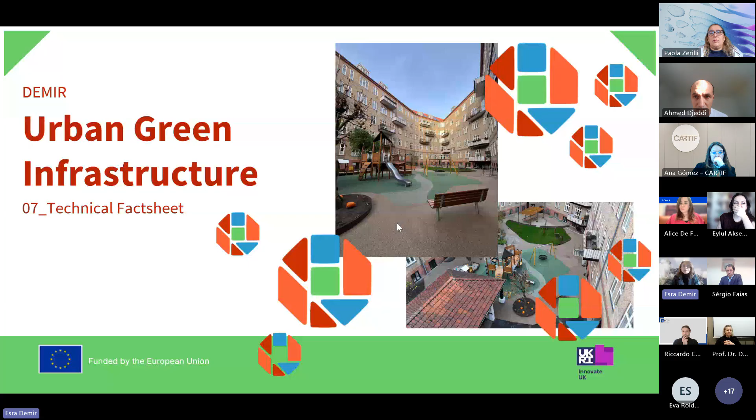So what is it? Urban green infrastructure are designed networks of natural and semi-natural spaces, which can include parks, green corridors, green roofs, community gardens, even facades, green facades, green walls. They are connected networks of green elements, vegetation, and water elements as well.

So the main objective of urban green infrastructure is to enhance biodiversity, improve environmental quality, such as air quality, water quality, soil quality, and it will also support climate resilience by flood prevention or cooling effects, and it supports human health and well-being.

And as you can see, those objectives are not easy to materialize or monetize. So it is a difficult decision for local governments or private investors to make or to justify the investments in order to get financing support.

As we mentioned, the core components can be green roofs, community gardens, urban reforestation, especially if supported by pollination, so that the biodiversity can be more effective.

So the functional benefits, or side benefits, can be said to be stormwater management, habitat restoration, being able to reach green spaces within a shorter period of time, and contribution to the urban ecosystem with health and carbon reduction benefits.

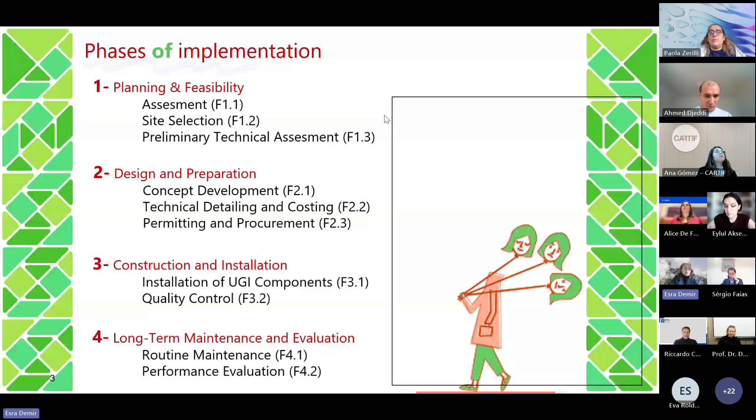So in terms of technical aspects, we have already started talking about how we can do it effectively. It can be really complex, like green roofs, or it can be easier depending on the topography or the area, for example reforestation, if it is suitable. So the site conditions, the existing infrastructure, and the need to integrate routes matter.

For example, when you are talking about green corridors, you need to take into account the infrastructure around the area. The labor, as I said, requires expertise, and it is not very easy to find. Urban green infrastructures are not very technically demanding, but still they need to be carefully designed and maintained.

Initial investment costs are, some of them higher than others. A mixed use of all of them can be a solution to decrease investment costs. As we said, maintenance costs can be significant, and funding sources are usually municipal budgets, but private investors, companies, stakeholders, or citizens can also be involved in funding, though it is not very common right now. Securing funding is key to the maintenance of urban green infrastructures.

In terms of environmental impact, we can say the highest score is the environmental score, because it has a lot of environmental benefits. Urban heat island effect decreases, air quality and biodiversity increase, and as we said, these outcomes are not easy to materialize. It also supports climate adaptation and sustainability of the city.

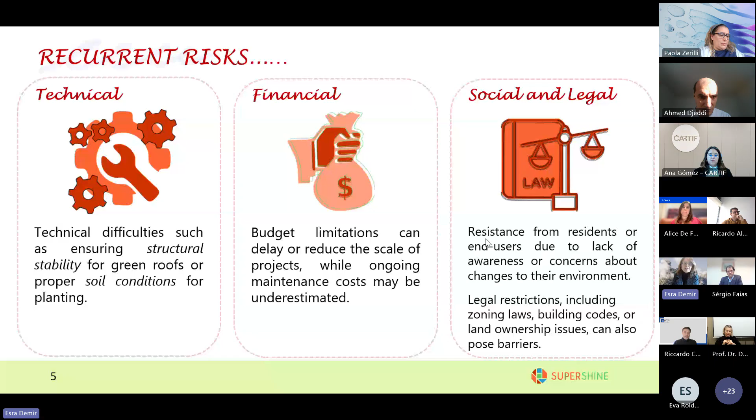Recommendations for urban green infrastructure include integrating it into urban planning early, which makes it easier for the city to implement and allows the best selection of areas to implement urban green infrastructure. Engaging communities at an early stage is also very important.

Site and stakeholder assessments are key to a successful implementation, and monitoring performance and adapting to different circumstances is also key, but this is sometimes the most difficult area in urban green infrastructure.

When it comes to what not to do with urban green infrastructure: if you think of it as just decorative or something that will look nice, it might not be a good investment, or you might overlook some critical issues, leading to more trouble afterwards trying to fix the damage.

Short-term funding will not cover maintenance for the long term, so it's not safe to rely on that. Trained maintenance is very important, otherwise the vegetation might die, there might be water leakages, or many other problems can occur.

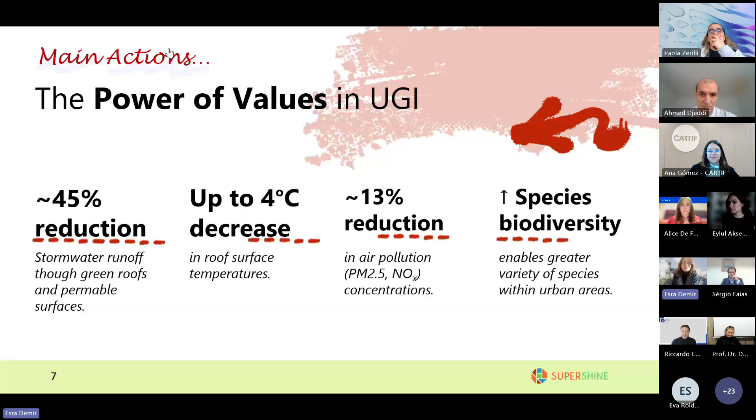And I think that's it. Now I will give the screen to Ana so we can ask some questions. If you've gathered any useful information from our presentation, I hope you found it useful, and if you have any questions, I can always answer.

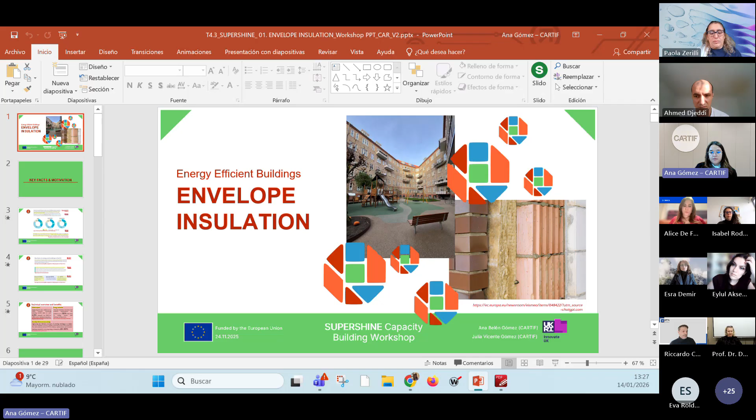Just make it full screen and we are there. Okay. Thank you, Ricardo.

Hello, everyone. I'm Ana. I'm joining with my workmate, Julia. Today we will present the envelope insulation topic. I want to share with you some slides about this important topic and intervention in the building facade.

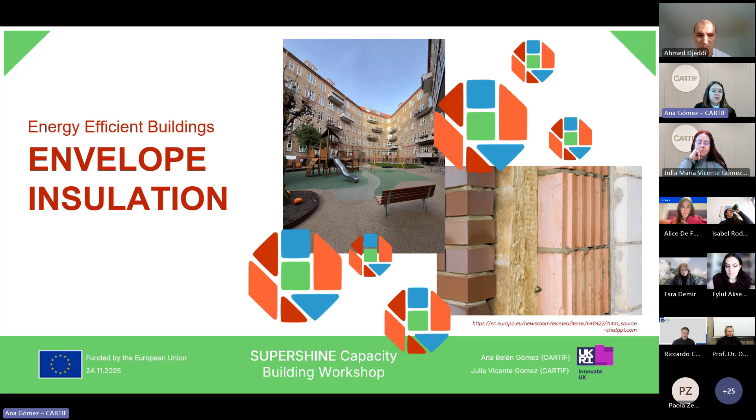Because the work carried out on this element could improve the energy efficiency and reduce energy consumption as well. To start this technical webinar, we would like to share some general data about the European current energy context, so that everyone understands why improving the building envelope is so important and necessary these days.

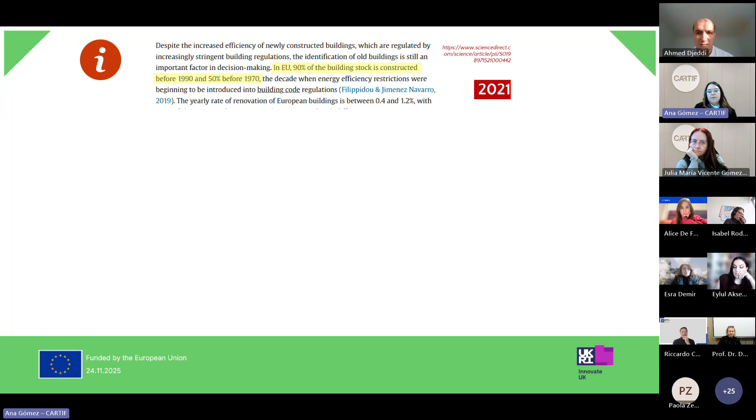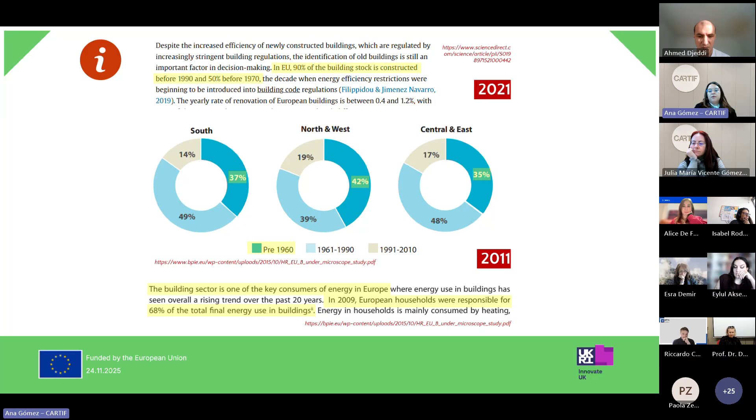According to a current publication on the European Commission official website, in Europe 85% of buildings were built before the 2000s, with 75% of them having poor energy performance, which increases the European energy consumption used in buildings. In the same line, 80% of the energy used in European homes is for heating, cooling, or hot water.

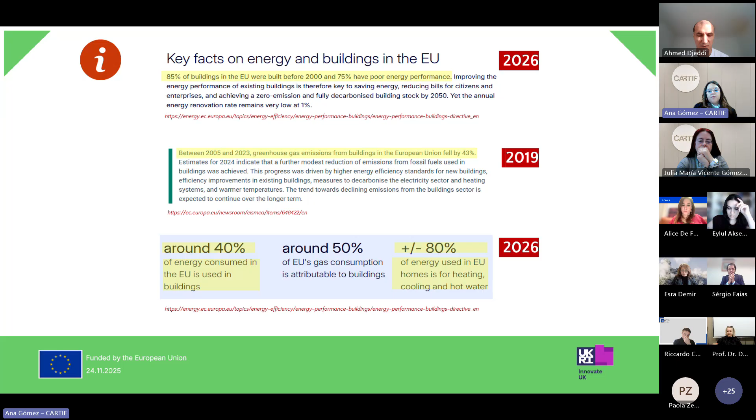Bearing in mind all this data, it's clear that we need to improve the condition of the old building stock in Europe, focusing on the need to improve energy consumption to achieve the European goal of neutrality for 2050. And one way to achieve this is by working on improving the building envelope or facade.

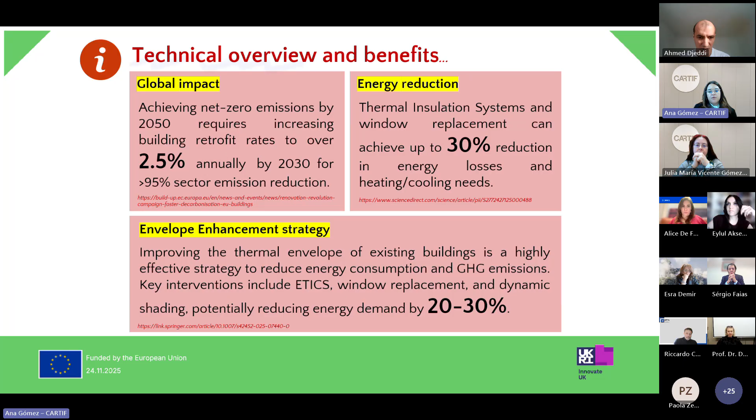Indeed, retrofitting the thermal envelope and replacing windows can reduce energy demand between 20 and 30%, and achieve up to around 30% reduction of energy losses. In fact, the bearing part of the envelope is not changed, but some elements could be added to change the building's energy behavior. Now we are going to see some of them.

I want to focus on the option and the role of passive strategies in building facades. These strategies are design solutions that can reduce energy use and improve comfort without using mechanical or active systems.

The goal of this intervention is to build with envelope, orientation, natural ventilation, and sunlight to reduce the need for heating and cooling. Using natural conditions is one of the key aspects that should be considered when designing or implementing this kind of solution. For that reason, the localization of the building is one of the most important factors in this case.

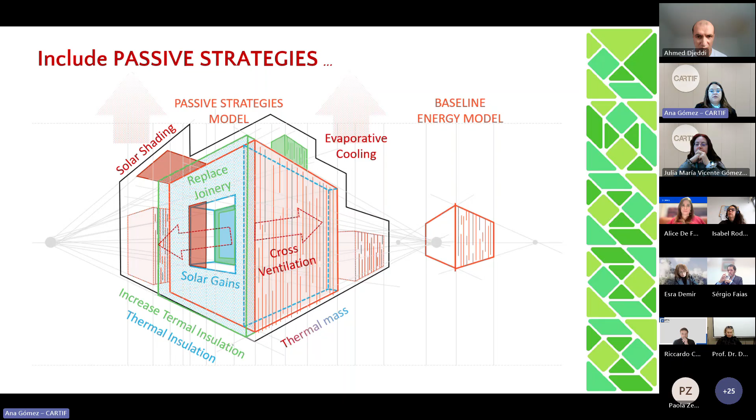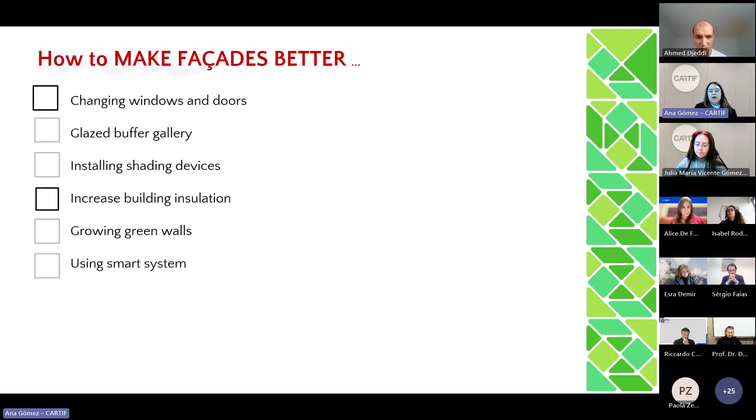Considering the importance of these strategies and under the umbrella of the SUPERSHINE replication plan, we developed an analysis of how many degrees, how much temperature, and how much energy consumption decrease can be achieved when these strategies are applied to existing or old buildings. Now we can start seeing some of the solutions. There are many ways to improve the facade or work with the envelope of a building. Some of the most common ones are the actions we are going to see first.

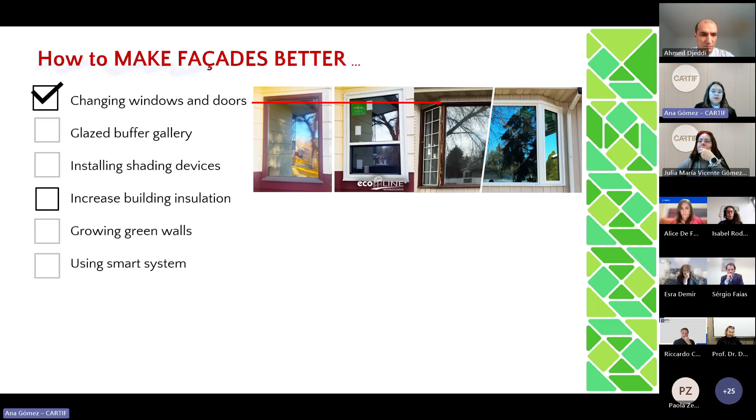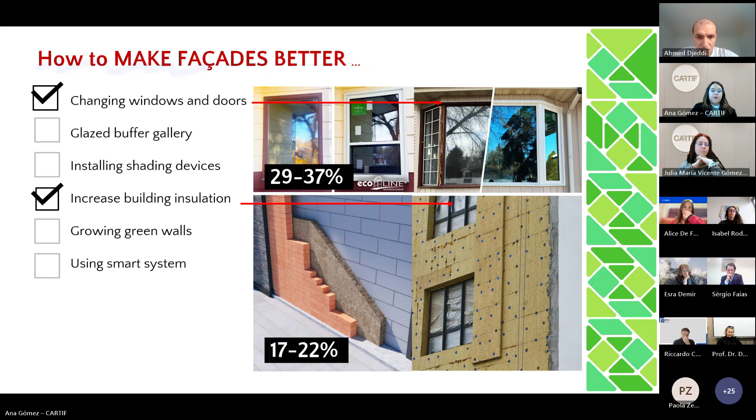The other main action to reduce energy consumption in a building is increasing insulation or using an ETICS system. This can reduce energy consumption by about 33%. In the SUPERSHINE case, the values obtained range between 17 and 22%.

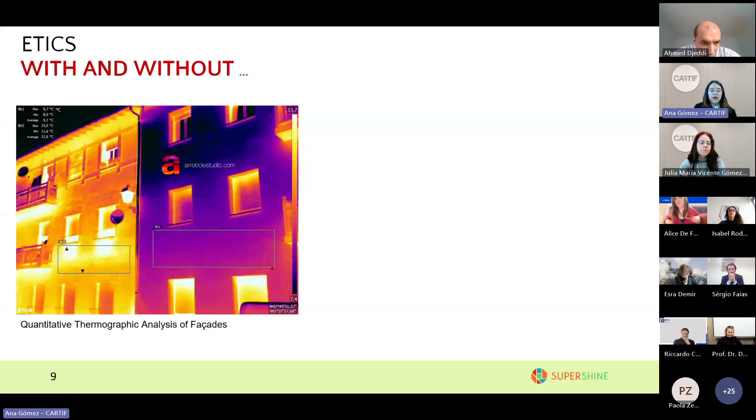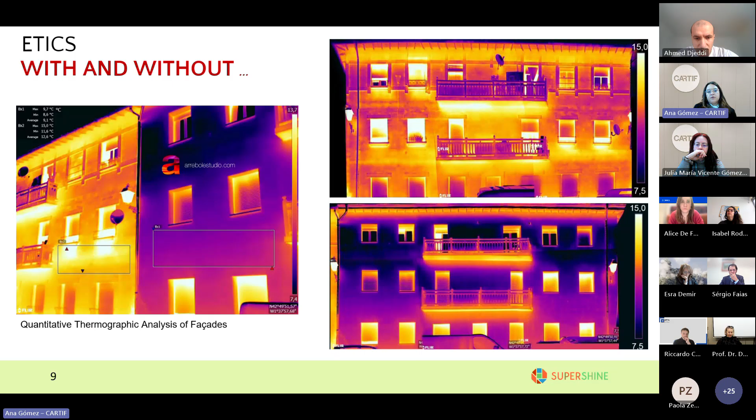Now we continue with the importance of improving insulation in a building. In this picture, you can see the impact of this kind of solution through thermal photos. We can see a comparison of the same facade: one is the original state, the other where the ETICS system has been installed. By comparing both photos, we can see the insulation effect and how conductivity and thermal bridges are reduced. In the facade with the ETICS system, thermal bridges are mainly located on the balcony and in some parts of the windows, while in the original state, thermal bridges are present across the entire facade.

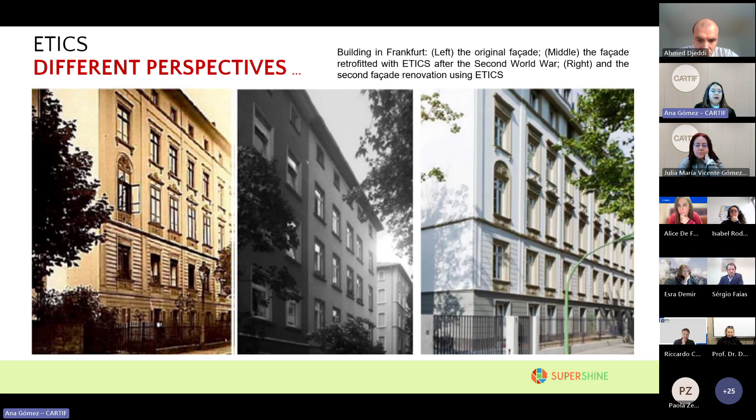A facade that is not insulated produces about 33% of heating losses, and heating losses through the roof are 25% as well, so it's a very high value. For that reason, the roof also has to be taken into account when speaking about the envelope, and it's very important to consider this in deep renovations of old buildings. This picture shows a sample of this kind of deep intervention.

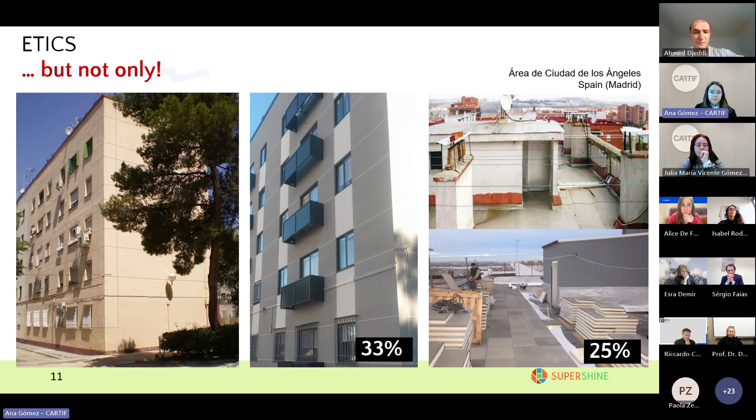For the last part of this ETICS brief information, one thing we have to take into account when intervening in an old facade is the possibility of losing structural capacity. For that reason, one common solution when applying an ETICS system to a building is to include a self-supporting system, or alternatively, create a substructure where it can be installed.

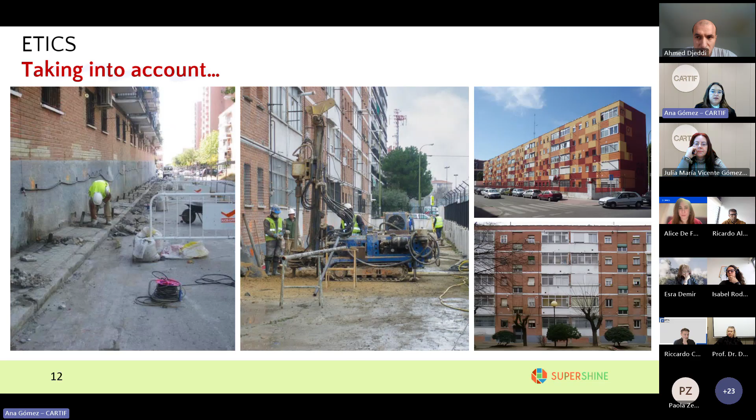Continuing with the passive strategy: another way to intervene in the facade is adding a glazed buffer gallery. This solution can reduce energy consumption by around 50%. In the SUPERSHINE case study, this action will allow an energy consumption reduction of almost 19 to 33%.

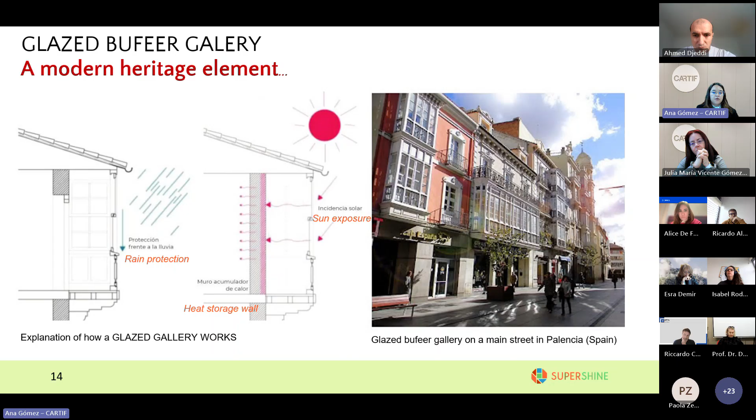These elements also allow sunlight to enter and warm the space. At the same time, the gallery protects the facade from humidity and allows the wall to retain heat and increase its temperature. It's important to consider that during hot periods, it acts as a cooling element, improving performance as well.

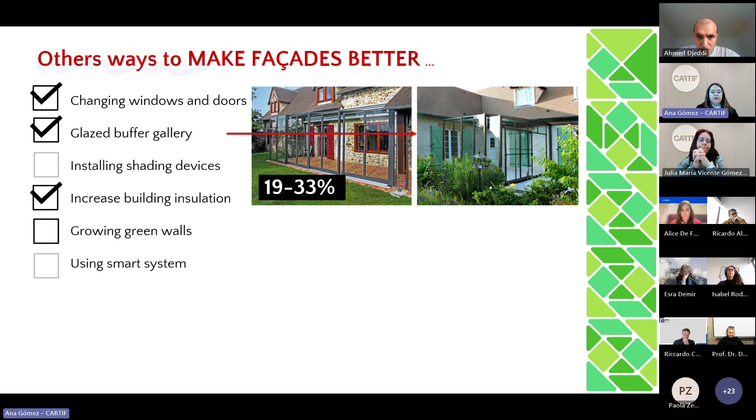Another system that can be installed in envelope retrofitting is a green wall. For the case of green facade, its installation can reduce energy consumption by around 22%. And in the SUPERSHINE case, the value ranges between 11 and 80%.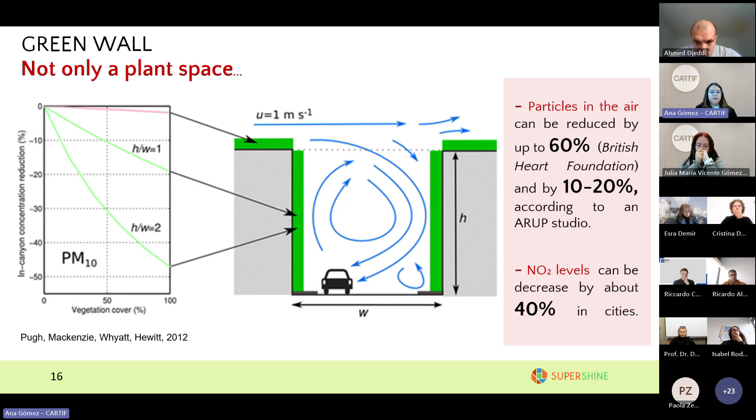Green facade and green roof can help reduce these problems. Previous studies showed that the installation of these elements in urban areas can reduce air particles by up to 60% as well. These types of solutions are linked to nature-based solutions presented previously by Demir.

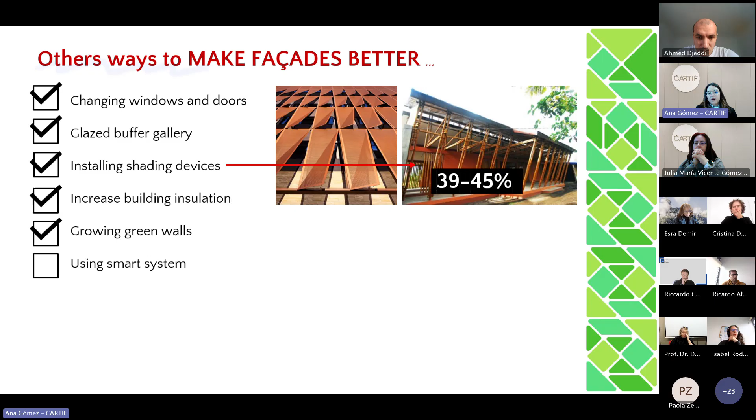Another important intervention, especially because of climate change and the increase of world temperature, is the installation of shading elements. In this case, the design of the solution is very important as there are many different types of structure, material, and ways to install them. This element is not only an aesthetic option but a really functional one, because it depends on the location of the building and the placing of this element.

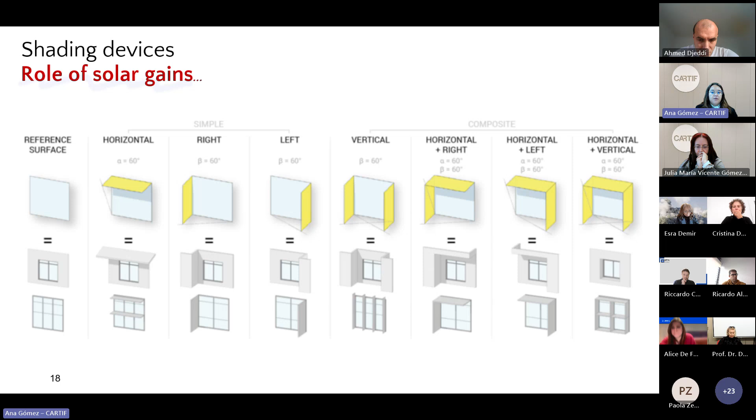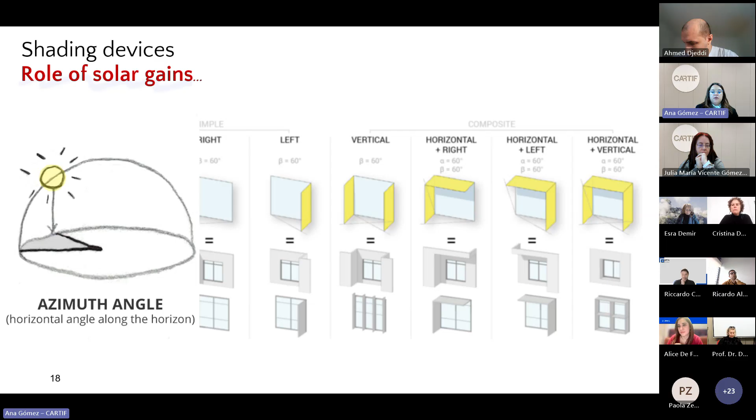One thing to take into account in this installation design is the azimuth and the sun altitude angle. The azimuth is the angle between the north and the perpendicular angle for a window's position. And the solar angle is the angle formed between the sun and the floor projection of the building.

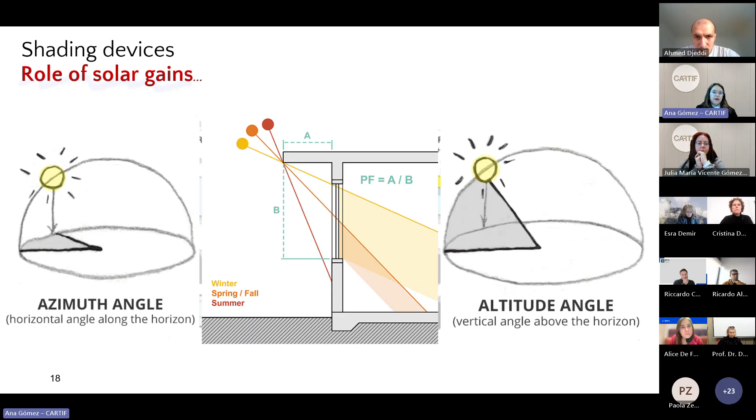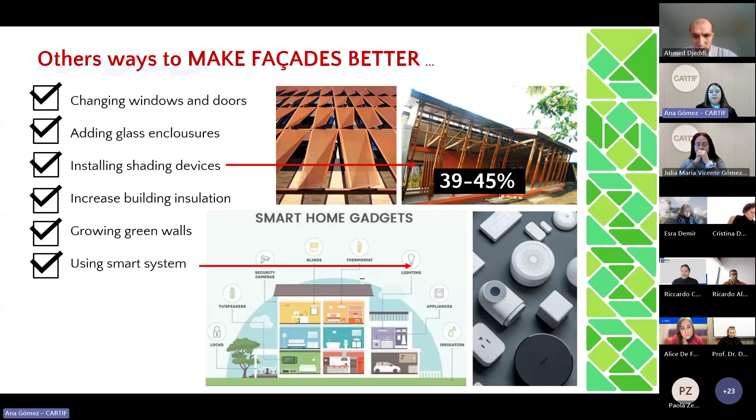Finally, for this part of the webinar, I want to continue with a brief talk about smart facade sensors. This element is not strictly a passive element or strategy action. In many cases they are installed on the envelope and help improve the energy behavior of the building.

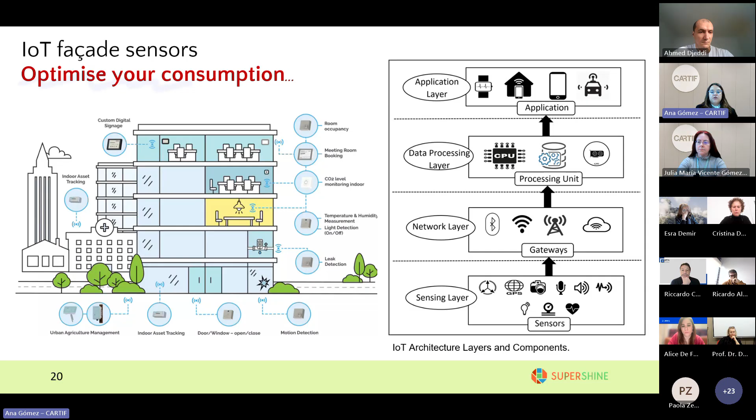The sensors control energy use and improve comfort for the inhabitants of the building, and can be used to adjust lighting and heating, ventilation, or air conditioning systems based on the movement of occupants, monitor indoor air quality, and detect water leaks, among other things. By providing real-time data, they help reduce energy consumption, lower costs, and improve building performance, while allowing the user to potentially know what is happening in their buildings.

So to sum up the previous information, I want to add that it's important to find buildings built before the 1980s, and retrofitting should be prioritized in urban areas, as in general they have higher energy losses. A reduction of around 90% in energy consumption is obtained when you change the windows and improve the insulation.

And interventions are not limited to the building envelope system. You can intervene with other elements such as green facades, glazed galleries, or shading elements, among others.

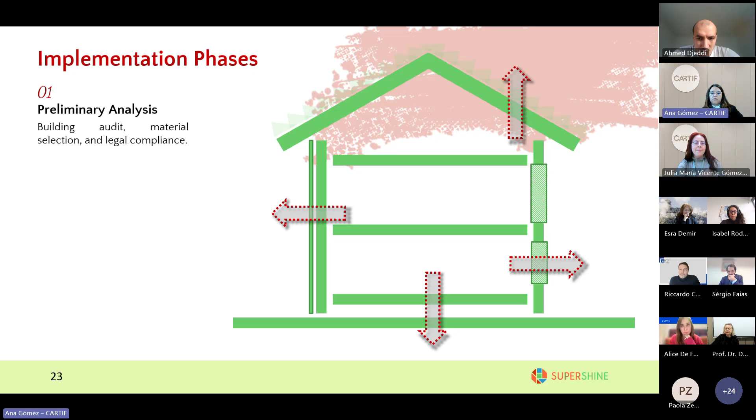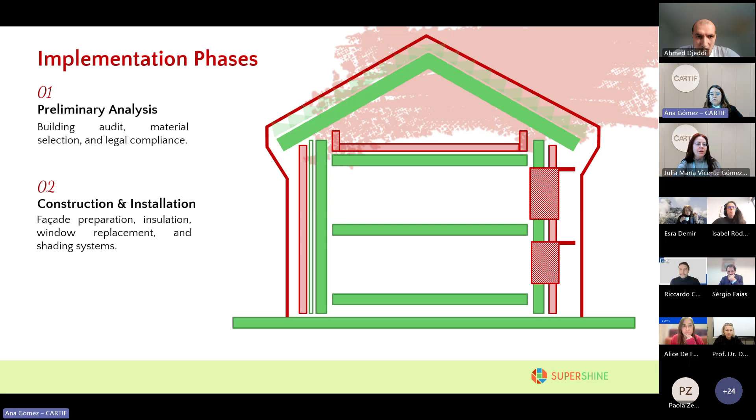Next, the second phase would be the construction itself, the installation of the different elements. This includes the preparation of the facade, in case that is needed, to put some of those new elements for the building, for example the insulation itself, the replacement, and so on.

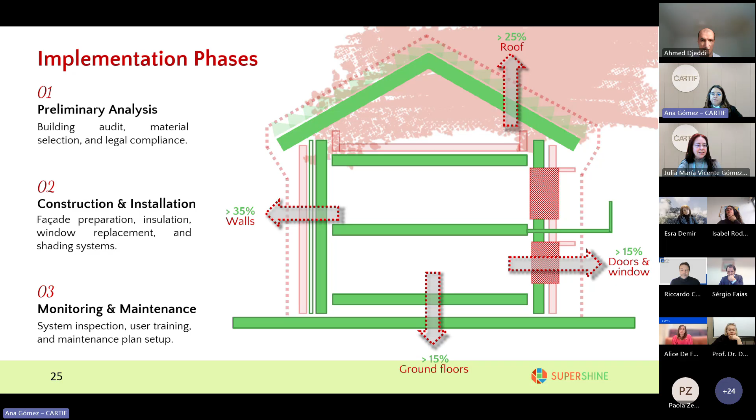Finally, we don't have to forget this last phase, which is the monitoring and maintenance phase. In many cases, we need to put in place different inspection systems. It's maybe needed to have some training, both for the users inside the building but also for the maintenance staff. And also a maintenance plan is needed. All of these will have, together with it, the economic aspects.

Yeah, go to the next slide. Sorry. So the last part of this, we wanted to share with you some of the recurrent risks that we have identified with the experience of the project partners in this kind of actuation in refurbishment of old buildings.

As you can see, we have divided this into different areas. In the technical part, one of the main things is that, since we are retrofitting old buildings, in some cases there can be damage. If we do this initial inspection, we can maybe see some damages that were not initially seen, and this can make the work more difficult. Maybe we are going to have to select different aspects that were not initially contemplated.

We also have to take into account, as I was saying before, the climatic conditions of the city where the building is located. Even with the current time, we have to account for things like heat waves or high humidity climates, maybe if the building is in a coastal place. So not all materials and solutions are to be applied in all buildings, we have to select the more appropriate ones. And as Anna mentioned before, some aspects on thermal bridges have to be taken into account, because if we fix everything, we can have other problems in the future. So technical staff defining the solutions have to take all these aspects into account.

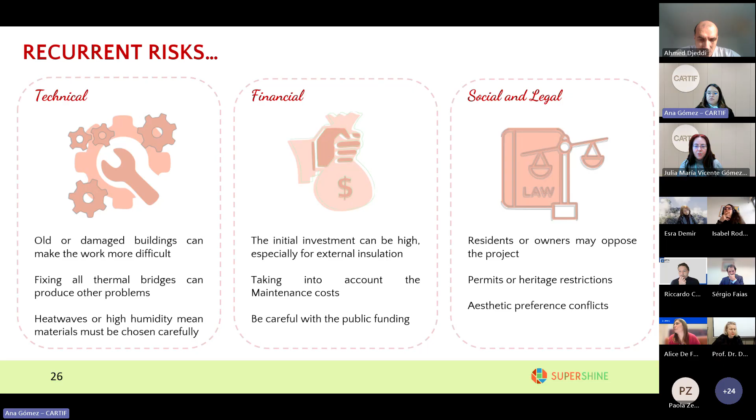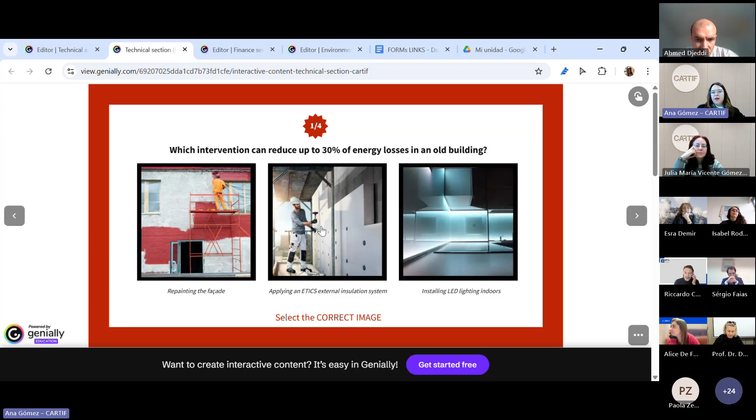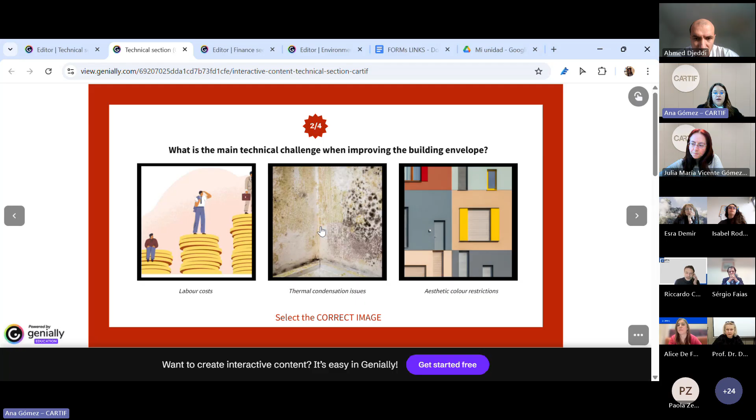The second question is: what is the main technical challenge when improving the building envelope or facade? This information was provided during the first part of the technical webinar, and in that case the correct answer is the second option: thermal condensation issues.

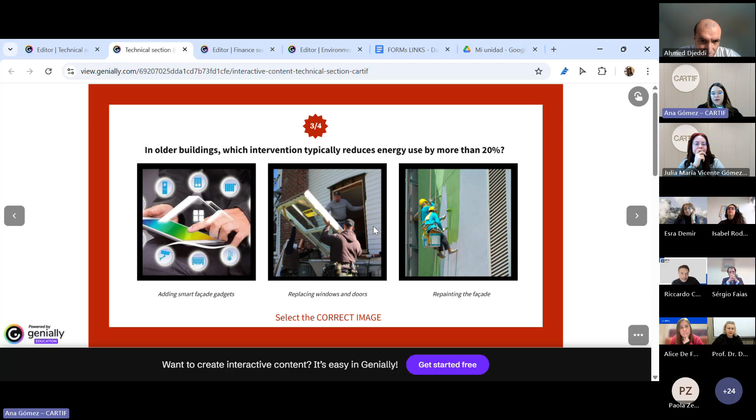The third question is: in older buildings, which intervention typically reduces energy use by more than 20%? Obviously a smart facade gadget takes no action, it's only a sensor, and painting the facade doesn't improve the energy behavior of a building, so the correct answer is the second one.

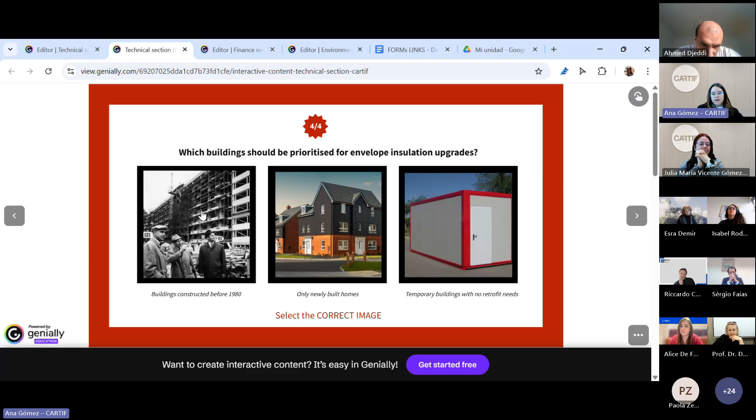Congrats to all the participants. I don't know if anyone has a question about this technical part, or otherwise we can move to the next one if you consider. Yeah. Okay, I personally did it again, so good.

No, pretty interesting. What we see in this presentation is that the combination of interventions, if financially suitable, is one of the best possibilities we have, not only to increase the performance of the building, but also to tackle environmental issues like pollution and health issues related to citizens and people living in the city or neighborhood we are working on.

And so, going through the environmental issues, we move to Circe and to Eva for her presentation. So Eva. Okay, yeah, here I am. Let me share the presentation first. Okay, can you see it right? Yeah, I think so. Is it already presented? No, Eva. No? It's loading. Yeah, not there.

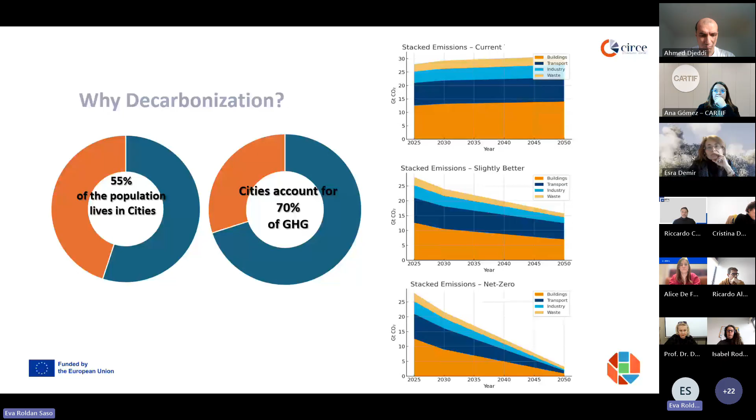To address this strategic axis, we can materialize it or drive it through specific actions like deep renovation of existing buildings, deployment of efficient and grid-interactive infrastructure, larger scale integration of renewable energy sources, or the promotion of zero emissions mobility across the city.

Looking a bit more in detail, regarding the deep renovation of existing building stock, it is one of the most effective decarbonization measures, because by upgrading envelopes, HVAC systems, or installing renewable facilities, it's possible to significantly reduce energy demand while improving the comfort and indoor quality for the dwellers.

By deploying grid interactive efficient buildings, they become or may become an interactive asset capable of adjusting consumption, integrating storage and shifting loads, providing at the same time system stability and facilitating higher penetration of renewable energies.

When it comes to the electrification of end uses itself, it is a key enabler for phasing out fossil fuels, because it allows building an urban system to rely on more clean energy or more clean electricity, in this case based on low carbon sources and renewable energy, if possible.

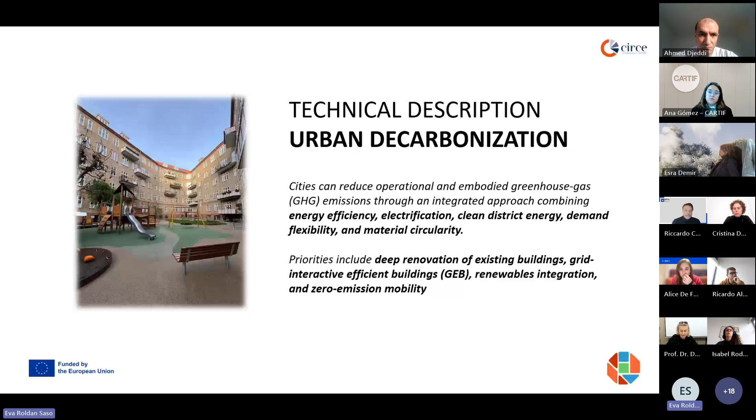Regarding zero emissions in urban mobility, it should also be refocused or transitioned to zero emission models based on electrified transportation modes, public and private as well, integrating digital solutions to optimize mobility flows and reduce congestion.

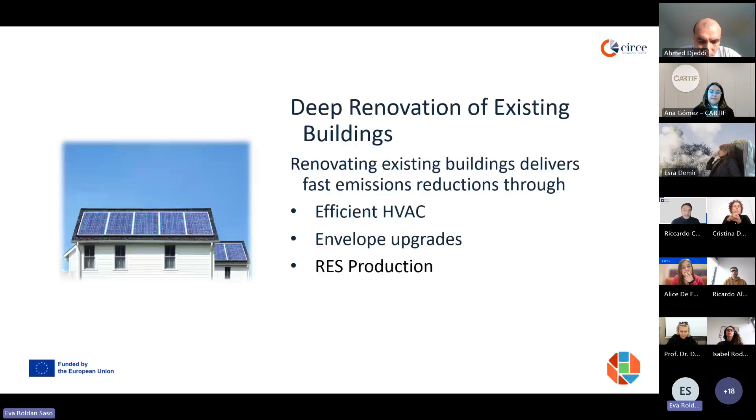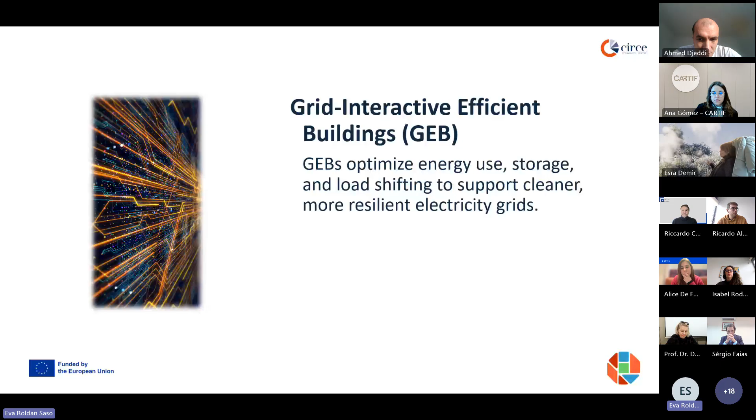But of course, all of these ideas of decarbonization are great, and all of this we already know. They are not news for us at all. The difficult part here is to know how to choose them effectively and implement them properly. For cities to deploy such an ambitious technical implementation in their different urban areas, it's necessary to follow specific preliminary phases or steps based on a structured framework to plan and select properly the most promising ones or technical measures before the real implementation.

The steps to be followed could be the following ones, more or less: the diagnosis and the target setup, the feasibility studies of the possible implementation to be done, third, the technical scoring of the implementations, and finally the implementation itself. The main objective of these different steps is to ensure that the intervention or implementation finally selected is technically solid or sound, economically viable, and allows the cities to achieve their goals.

Looking one by one, when it comes to the first one, it should be focused on performing a complete diagnosis of the city, establishing the baselines of energy consumption and emissions, collecting the building's performance data, and then analyzing the different load profiles. After that, based on the results obtained from this analysis, the cities should define their own targets and plans and roadmaps, aligned with the European goals and the different requirements of the directives in force, like the Energy Performance of Buildings Directive and the more general Energy Efficiency one.

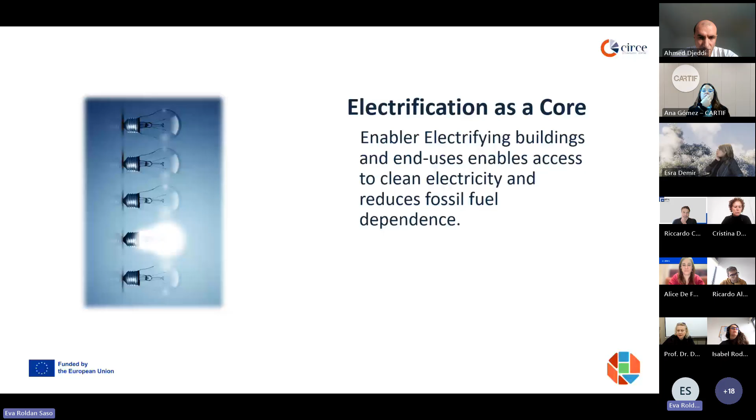In the second step, considering the targets already established by the city in the previous stage, it must be focused on carrying out the techno-economic feasibility studies of the different interventions susceptible to be deployed to reach the different targets. For instance, building retrofitting, electrification of systems, deployment of renewable energies or storage or different stuff. Based on the results obtained from these feasibility studies, the cities should select the feasible ones and reject the rest.

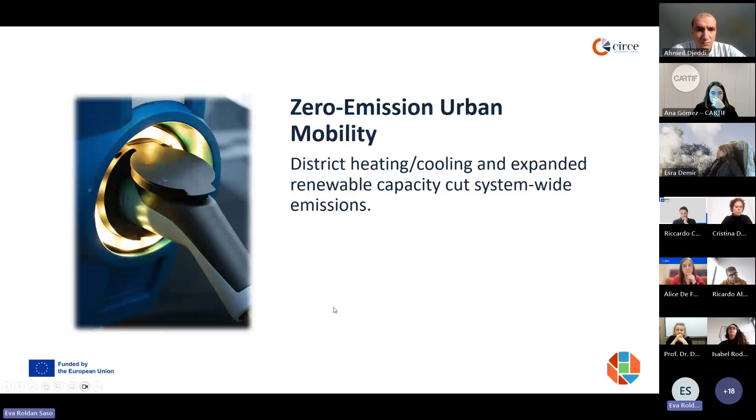So in the next step, once the feasible interventions have been selected for being the most profitable or most viable ones, the city should evaluate these interventions using a scoring criteria, evaluating different aspects or KPIs from a more multi-criteria point of view, including energy saving potential, emission reduction, cost effectiveness, replicability, social impact, or alignment with the European commitments or goals. This scoring assessment should serve the cities to guide their decision-making process and to prioritize their investments, first of all, to select them.

And finally, of course, the implementation phase should include the deployment itself of the specific technology strategies chosen for being the most promising and the more feasible ones, to cover the objectives set up.

But this intervention had to be well done, because it's important to stick to a solid plan to ensure that the scoring results theoretically calculated in the previous step are still valid at the end of the project. Because the costs can be higher than expected if you don't address or manage all the different actions properly.

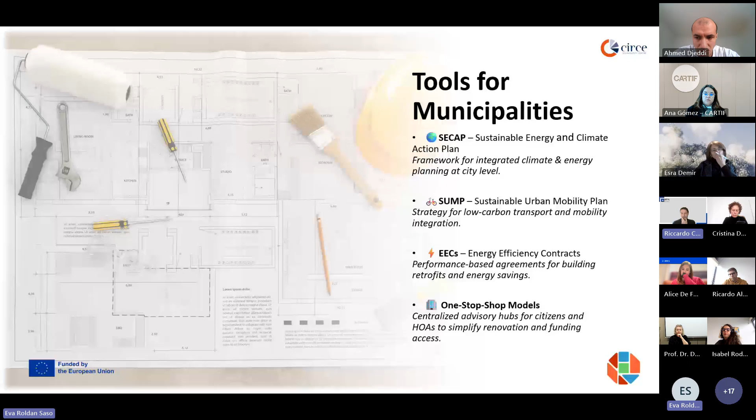Thank you very much, Eva. Thank you, really. We are almost on schedule. Now we have the last speech of this workshop.

It's on our main result and main focus of the entire SUPERSHINE project, the financial solutions and the financial possibilities in order to make the intervention in the neighborhood and have all the positive effects. For doing this, I will leave the floor to our scientific coordinator, the University of York team. So now Paola Zerilli is going to lead this part.

Thank you, Ricardo. Thank you to all the other colleagues for their very interesting presentations as well. So now we are going to talk about the financial solutions that we have been evaluating specifically for the SUPERSHINE Lighthouse districts, but also for the fellow cities. Ahmed, my colleague, is going to talk about the fellow cities particularly. I'm going to share my presentation.

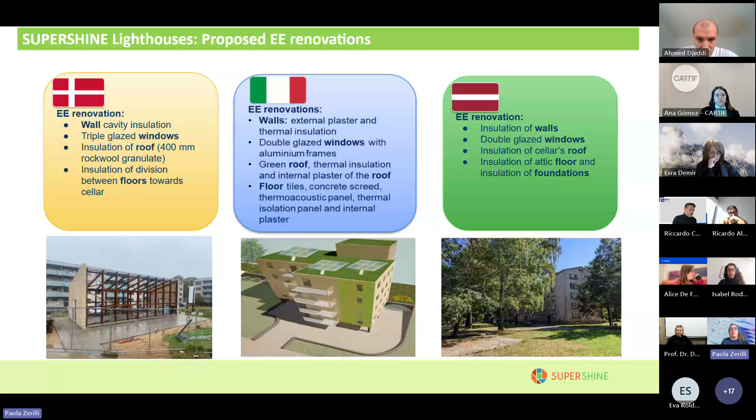And we have been calculating the energy savings associated to this intervention for the entire period of the investment, for all the cases. Again, more or less, these types of interventions have been discussed in detail, and the ideas also came from our Lighthouse district, so a bottom-up approach.

The reason I'm mentioning that is our financial analysis is based on the energy savings connected to each intervention. Considering the annual energy consumption per dwelling, the orange one is the one currently for each country, and the blue one is the one expected after the energy efficiency renovation. As you can see, particularly for Latvia, where the starting point is much lower than in the other cases in terms of energy performance, the potential savings are massive.

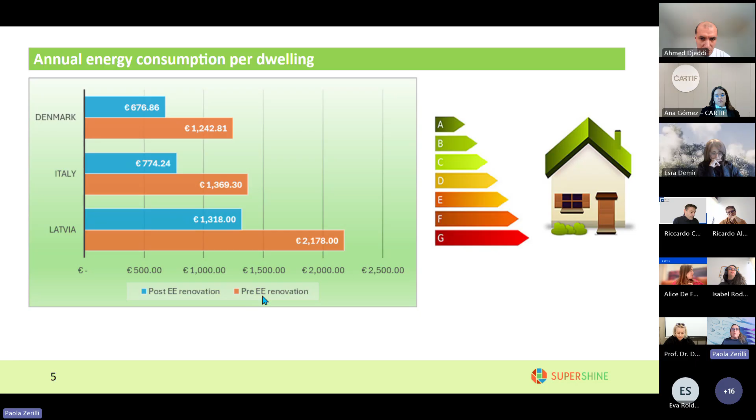Why are we considering all interventions altogether? Obviously it will make more sense because in terms of economies of scale, it will allow lots of financial savings compared to single interventions.

The reason is that we have been asked by our Lighthouse districts to also consider single interventions, because sometimes the entire intervention can be too disruptive for the tenants, or also too expensive to be done all at once. So that is why we have considered the single interventions as well.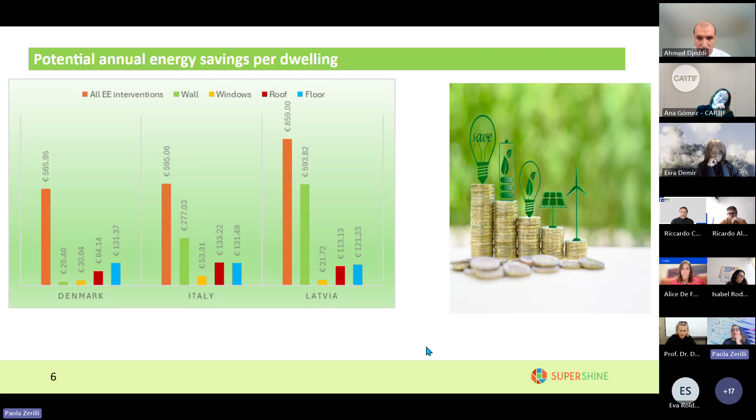Okay, so for most of our cases for our Lighthouse districts, the contract that seems to be performing the best is called share saving contracts, where all the investment risk is taken by the ESCO, and also the maintenance and operating costs are faced by the ESCO, the energy service company.

This applies in cases where the savings associated to the interventions are higher than the minimum guaranteed savings. Minimum guaranteed savings are the cost of debt associated to the investment. So if these energy savings are high enough, then they recover both the cost of debt, plus they get 65% of the extra savings.

In that case, the social or affordable housing company gets 35% of the extra savings. But if the energy savings are lower than the minimum guaranteed savings, the ESCO gets the energy savings, and the affordable or social housing company gets zero.

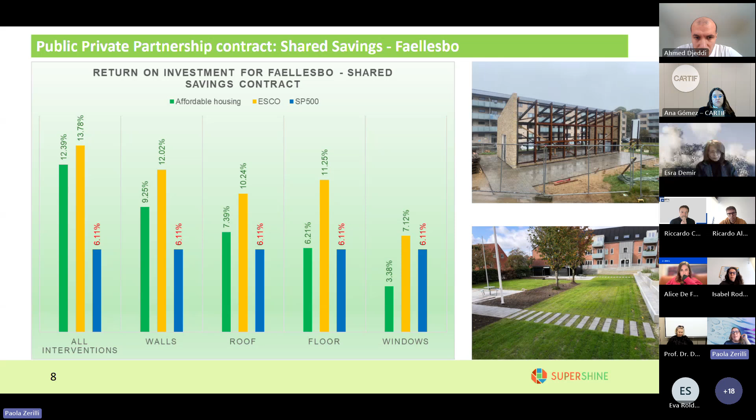But as I said at the beginning, normally the rule or constraint for this type of intervention, in order to get public funding, is that they need to pair at least a couple of these investments, for example wall and roof, or roof and floor, to reach at least something like 30% of energy savings. So that is why in all cases, this type of investment is, even from a financial point of view, not just considering the impact on the environment, very good for all parties, including the impact on energy poverty.

And the same is true for Italy, for Boito. We'll be sharing our slides so you can have more details, and we'll also be putting financial details about this type of investment on our website in the next couple of weeks. And the same is true for Riga.

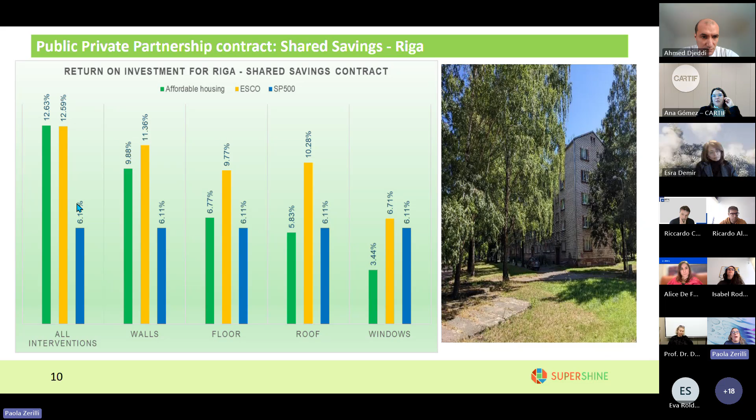So again, just considering it from a financial point of view, these investments are very good because they are always higher than a safe financial investment on the Standard & Poor's 500.

If we consider another main indicator of energy poverty, the percentage of residents unable to keep their houses cool in the summer and warm in the winter, this percentage of people affected by energy poverty goes down massively, particularly in Italy and Latvia, but also in Denmark.

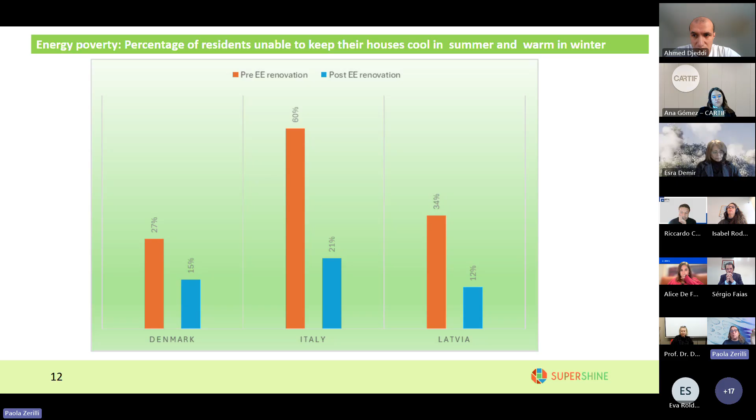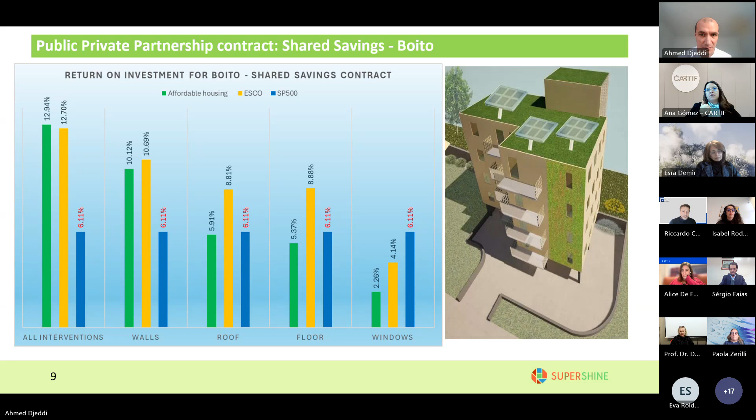Just let me share my screen. Sorry, can you see my screen?

So as part of the SUPERSHINE project, we also conducted financial and energy poverty analysis for the fellow cities, which are Portugal, Spain, Serbia, and Turkey.

So in Portugal, the building stock is 25 houses with EPC level F, and after the renovations it is expected to go to level A, and the total investment cost is 422,000.

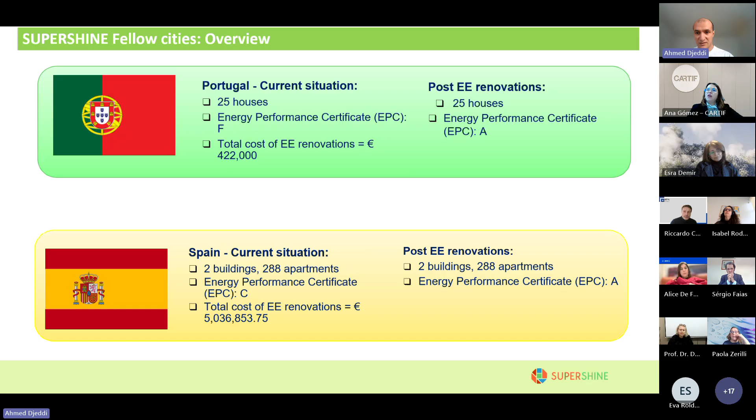In Spain, the housing stock consists of 2 buildings with 288 apartments at EPC level C, and after renovation it is expected to go to level A, and the total cost is a little over 5 million euros.

For Serbia, the housing stock consists of several buildings containing over 1,200 apartments with EPC level E, expected to go to level A with total cost approximately close to 1.5 million euros. In Turkey, the housing stock is 17 buildings with EPC between E and F, expected to go to level A, with total cost over 7.2 million euros.

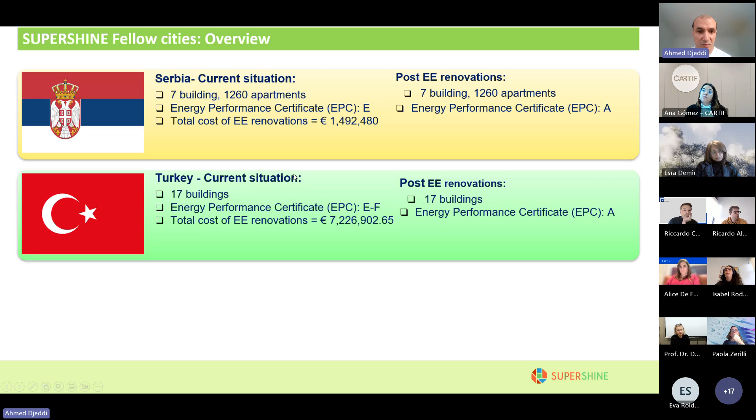For Portugal, we observed that the shared saving contract is also considered the most suitable, and under this contract the return on investment is higher than 14% for the social housing and the ESCO when all interventions are considered, which is also significantly higher than investing in S&P 500. This is also the case for each single intervention except the windows.

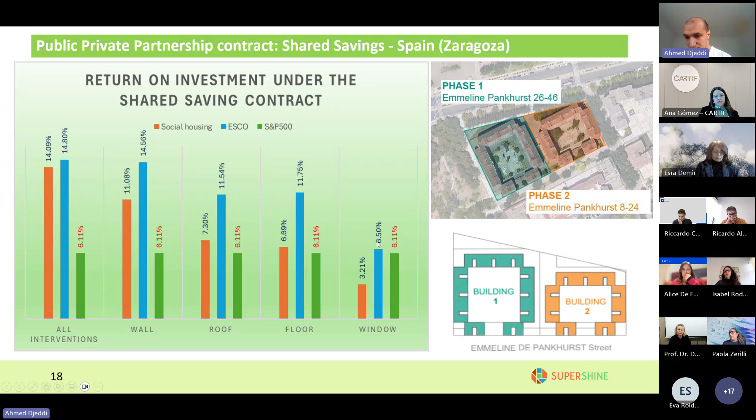We also present the guaranteed saving contract. Under this contract, the social housing organization is responsible for covering the investment cost, and if the energy savings are higher than the minimum guaranteed savings, they receive the minimum guaranteed saving plus 20% of the difference between the energy saving and the minimum guaranteed savings. If the energy savings are lower than the minimum guaranteed savings, the social housing gets the minimum guaranteed savings, and they also benefit from the increased value of the building. For the ESCO, if the energy savings are higher than the minimum guaranteed saving, they get 80% of the difference between the energy savings and the minimum guaranteed savings. If the energy savings are less than the minimum guaranteed savings, the ESCO is responsible for covering the minimum guaranteed savings to the social housing. Under this contract, the ESCO is also responsible for the maintenance and operating costs of running the energy efficiency technologies.

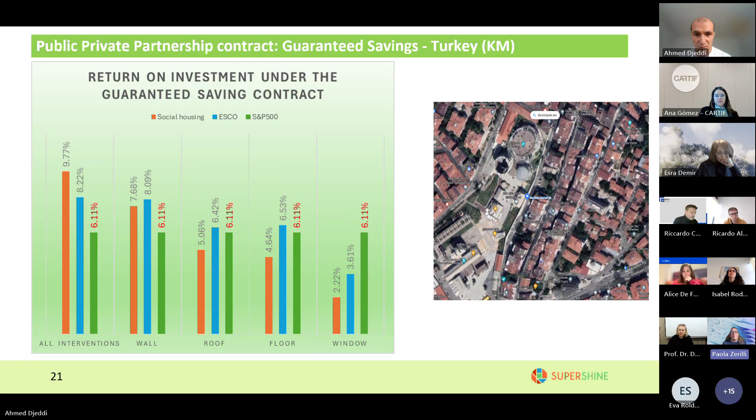Perhaps it would be more interesting to look at the energy poverty indicators now.

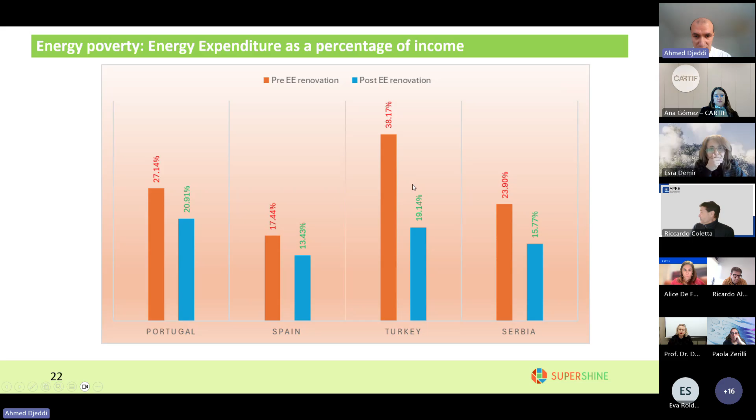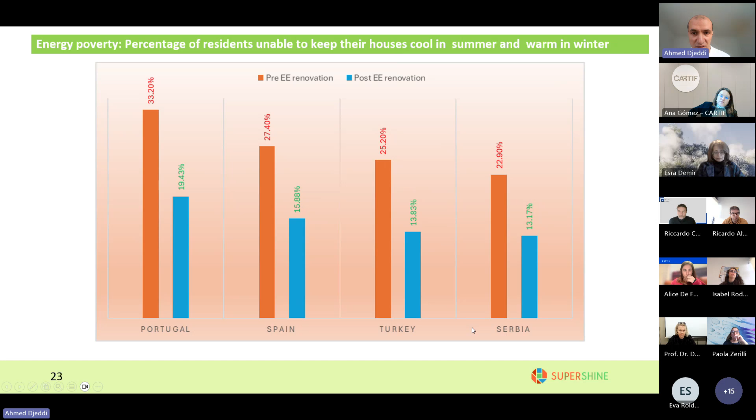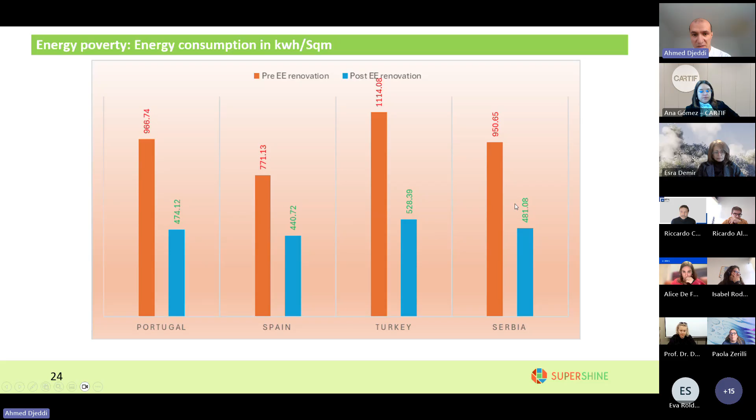For the energy poverty indicators, we considered three indicators. The first is the energy expenditure as a percentage of income, and there is a significant improvement in this indicator after the EE renovations are implemented, with Turkey having the highest improvement. The second indicator is the percentage of residents unable to keep their houses cool in summer and warm in winter, and we observe significant improvement in all the follower cities, of approximately 40%. The third indicator is energy consumption in kilowatt hour per square meter, where we also observe significant improvement, with Turkey and Serbia experiencing the most improvement. That's it for us.